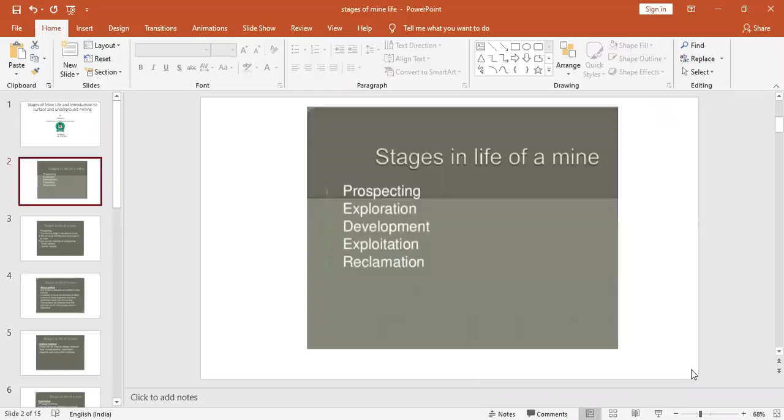Stages of mine life. There are five stages of mine life: prospecting, exploration, development, exploitation, and reclamation. Prospecting is the first stage in this stage of mine life.

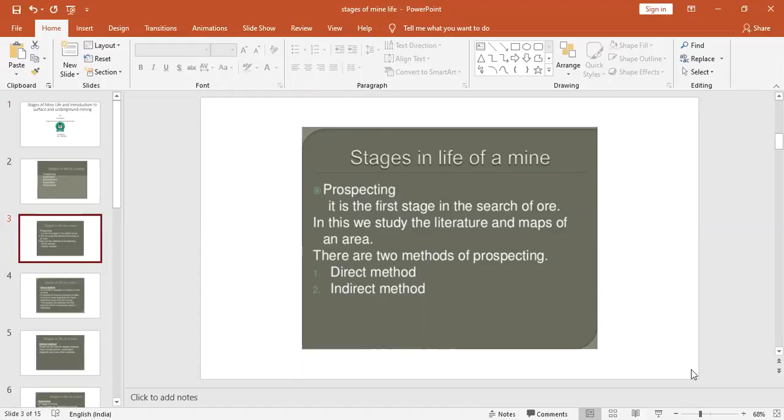In this stage, there is a search of an ore. The study of literatures and maps of the area is done. In prospecting, there are two methods: direct method and indirect method.

In direct method, it is limited to the surface or near the surface, meaning near to the outcrop. It consists of visual examinations of either outcrops or loose fragments that have been weathered away from the outcrop.

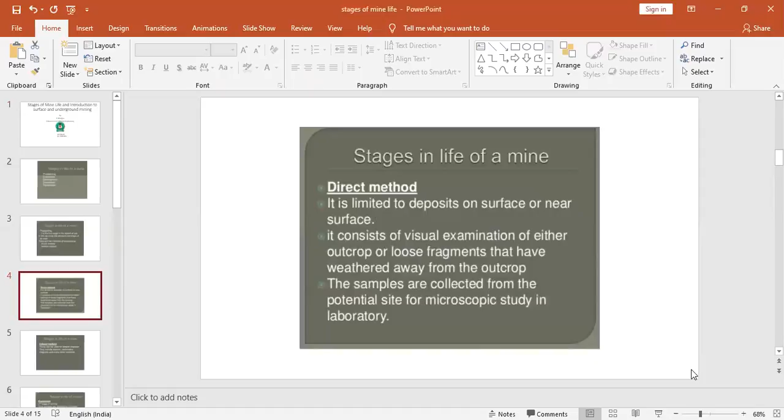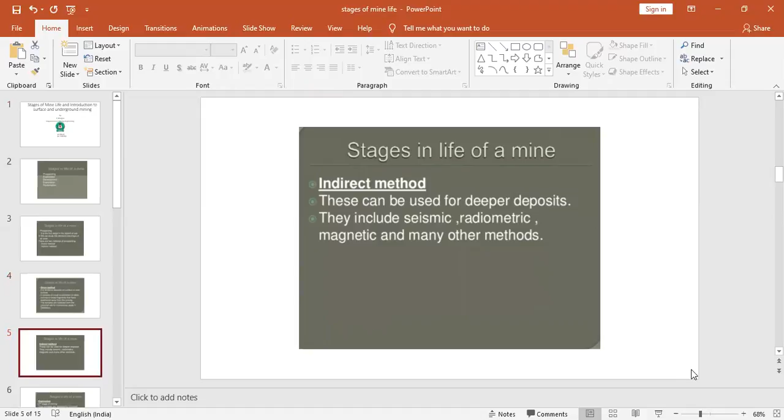The samples are collected from the potential site for microscopic study in the laboratory. In indirect method, it is a method where deeper deposits are present. It includes seismic, radiometric, magnetic, and many other methods for search of ore deposits.

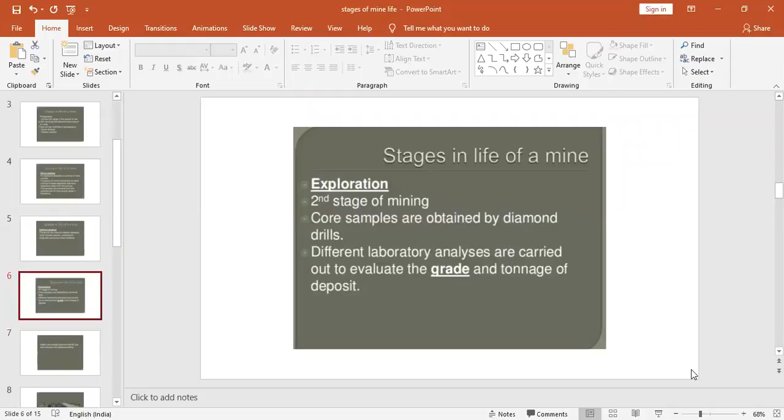The second stage is exploration. In this stage, core samples are collected by diamond drills. They are subjected to laboratory analysis, which are carried out for the grade and tonnage of the deposit.

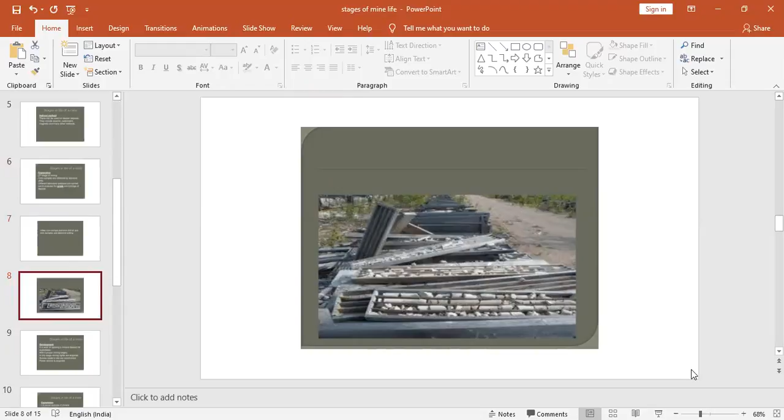For core samples and diamond drill bits are used. Here we have a picture of core samples which are collected from the drill holes and stored in a rectangular box for further process development.

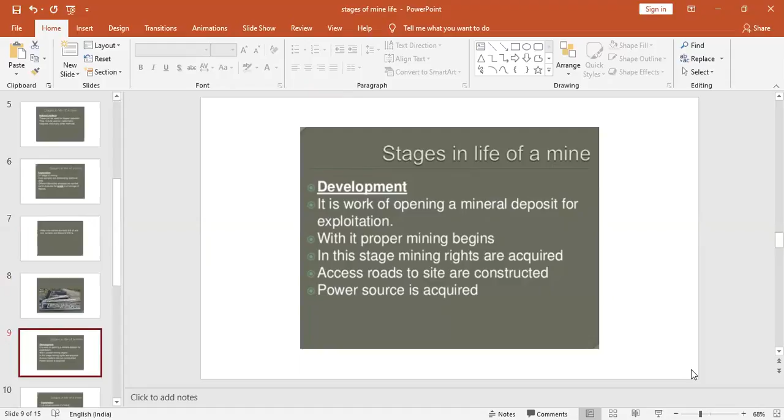This is the third stage of the mine life: development. It is the work of opening a mineral deposit for exploitation, with which proper mining begins. In this stage, mining rights are acquired, and development of access roads, construction, and power supply is started.

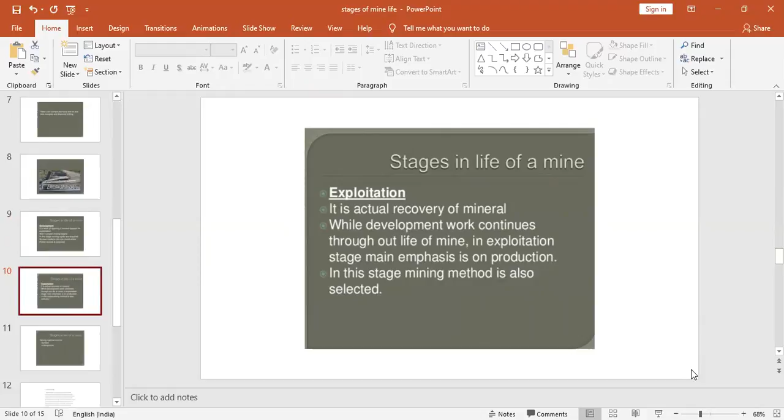Exploitation is the actual recovery of minerals, and this work continues throughout the life of the mine. In this stage, the main focus is on production, and mining methods are also selected. The mining methods are of two types: surface and underground.

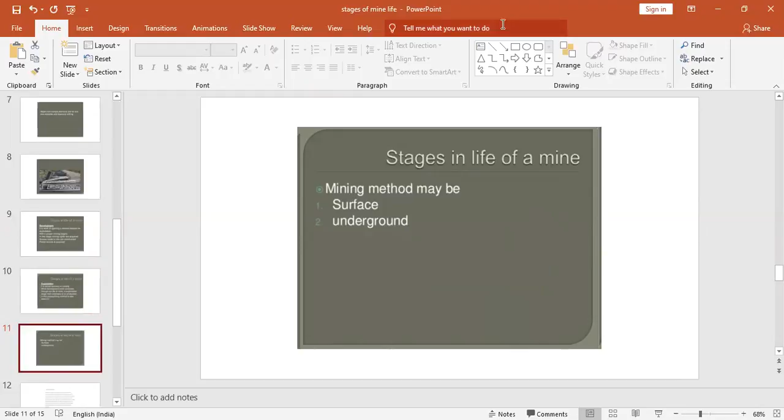This is regarding the stages of mine life. Now, a small introduction to underground and surface mining.

A small introduction to underground and surface mining: open cast mining and underground mining are the mining methods. Coal is mainly mined by two methods: surface or open cast mining, and underground mining. The choice of method is largely determined by the depth, geology of coal deposits, and other factors.

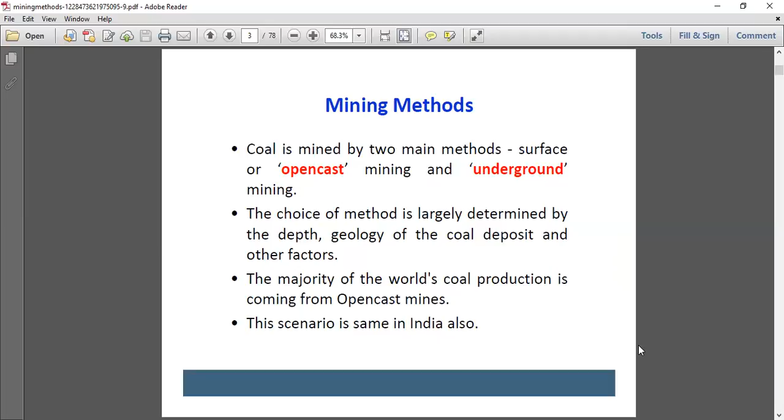The majority of the world's coal production comes from open cast mining. This scenario is the same in India also. The mining process includes drilling, blasting, loading, hauling, transportation, and processing or washing. This is a common process for every open cast mine.

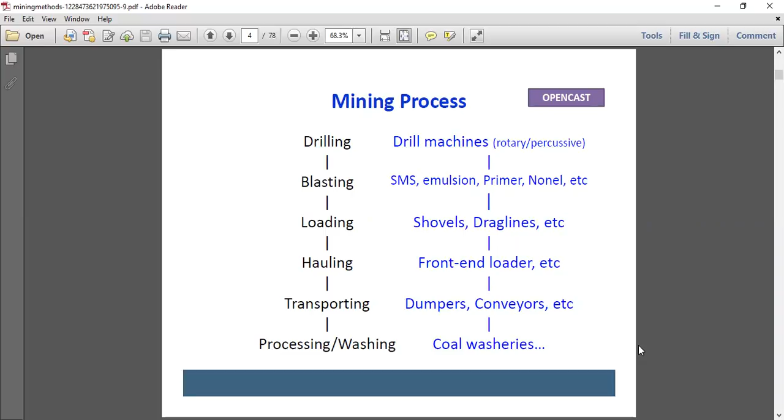Drilling includes drill machines; blasting uses SMS, primer, Nonel, etc. Loading uses shovel, dragline, etc. Haulage uses front end loader, etc. Transport uses dumper, conveyors, belt conveyors, etc. Washing uses coal washeries.

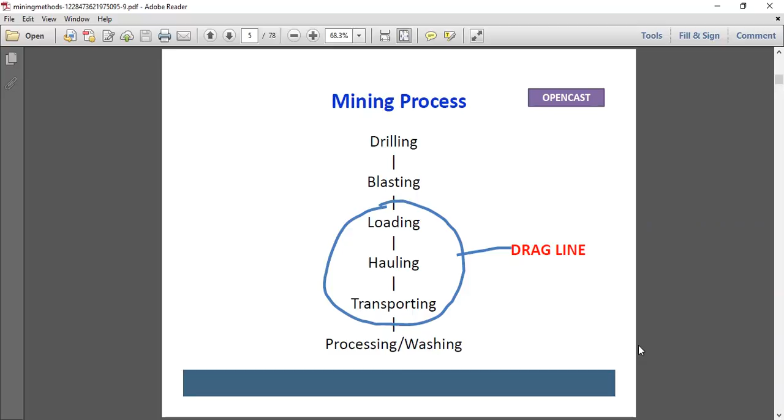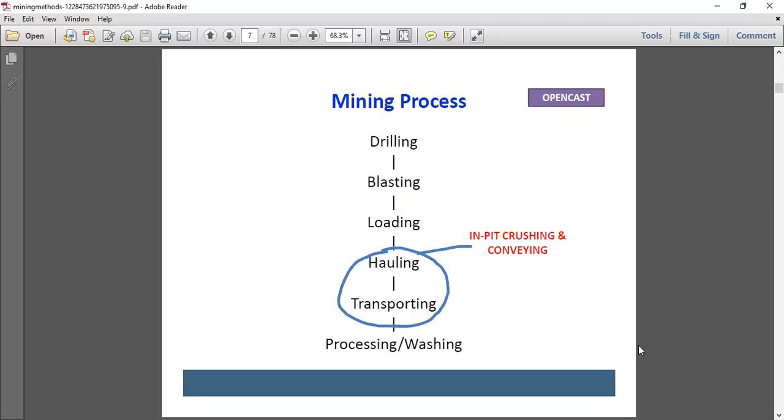The drilling process: mining process includes drilling, blasting, loading, hauling, and transportation. Loading, hauling, and transportation is done by dragline. Drilling and blasting is done by surface miner. Haulage and transportation is done by in-pit crusher and conveying.

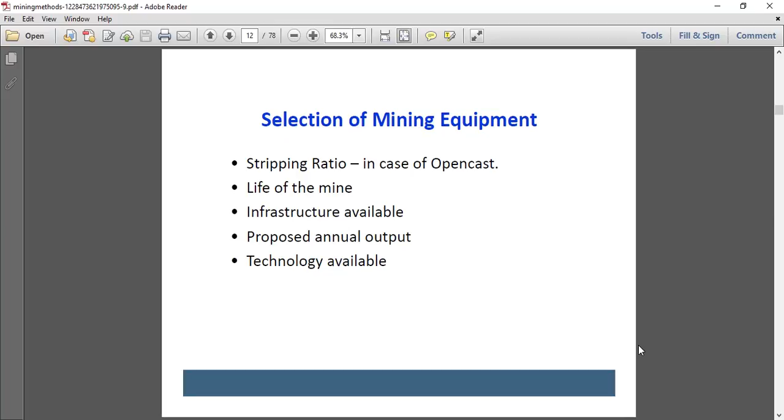Selection of mining equipment mainly depends on the stripping ratio, life of the mine, infrastructure available, proposed annual output, and technology available. Open cast machinery includes shovel-dumper combination, dragline, surface miner, bucket wheel excavator, and in-pit crusher.

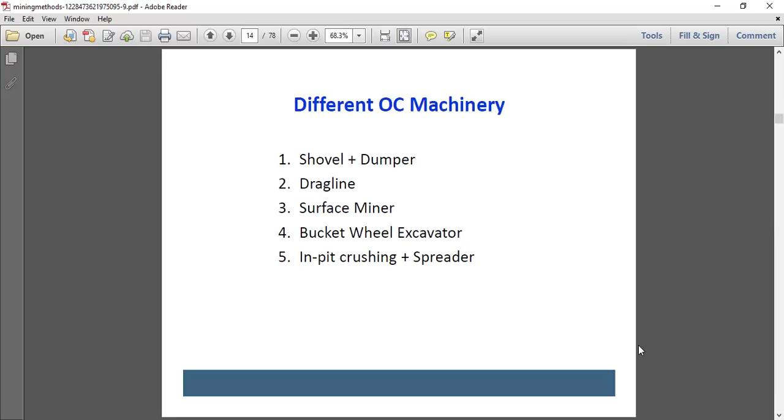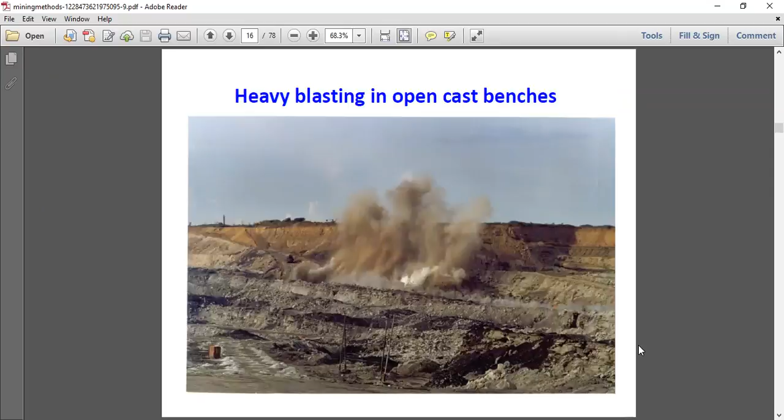Shovel-dumper combination allows multi-seam extraction, more flexibility, and can work in steep gradients up to 1 in 5. Here is a pictorial representation of the shovel-dumper combination.

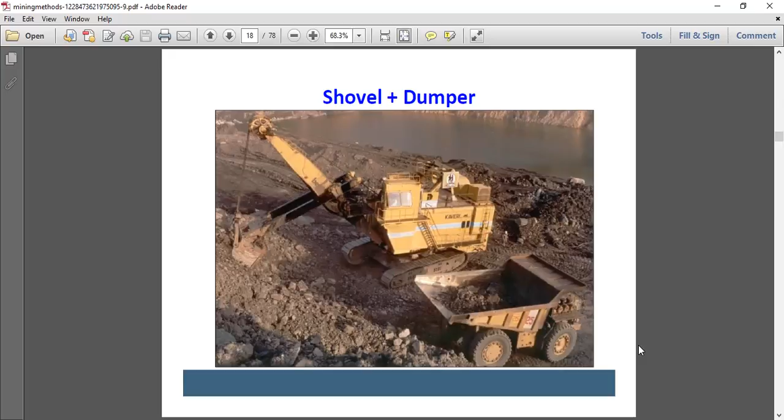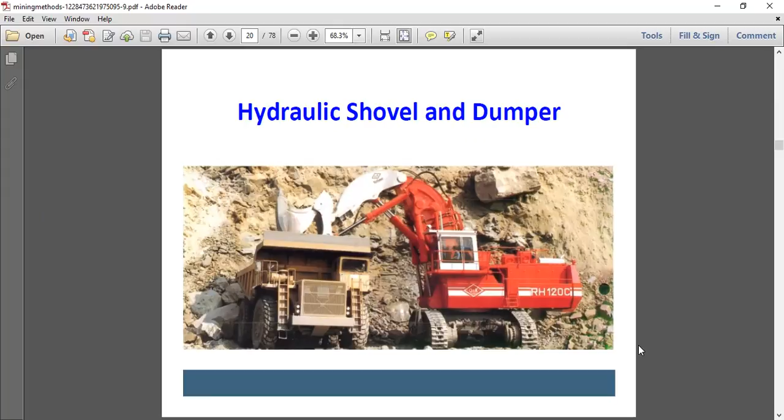Here is a rope shovel and dumper combination, and a hydraulic shovel and dumper combination. Comparing rope shovel and hydraulic shovel, the rope shovel and dumper combination produces higher production than a hydraulic shovel.

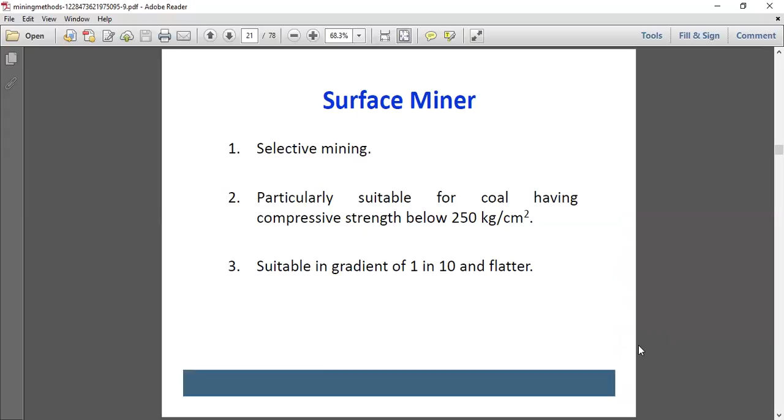Selective mining is particularly suitable for coal having compressive strength below 250 kg per centimeter square, and is suitable in a gradient of 1 in 10 and flatter. This is done using a surface miner.

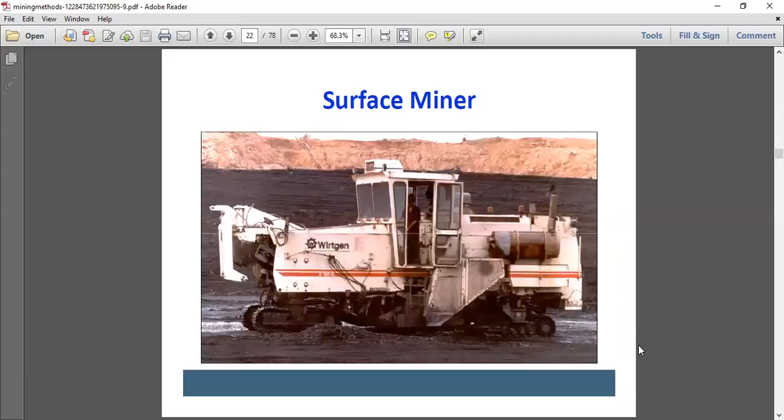This is a picture from the field work.

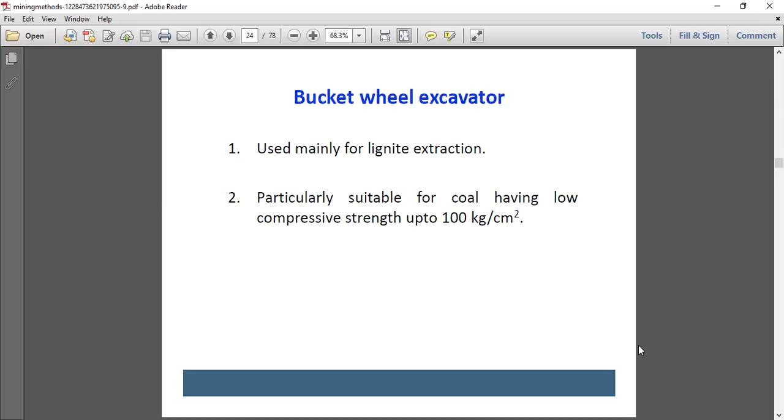Bucket wheel excavator is mainly used for lignite extraction and is used for soft deposits. Where deposits are harder, drilling and blasting is adopted. Bucket wheel excavator cannot dig hard deposits; it is particularly suitable for deposits having low compressive strength up to 100 kg per square centimeter. This is a picture from the site of a bucket wheel excavator.

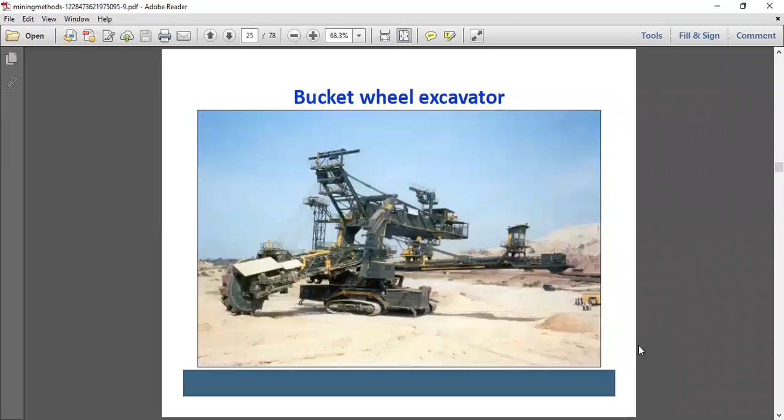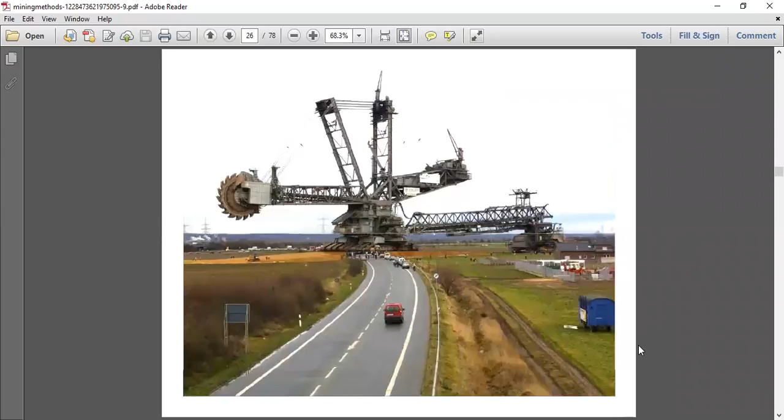Bucket wheel excavator is only adapted at Neyveli in Tamil Nadu. It is the largest equipment in India, or else in the world, and it can work continuously without any break.

The bucket wheel excavator rotates in a continuous manner, where it has buckets that perform the loading by itself, and the loaded material is transported simultaneously by conveyor belts.

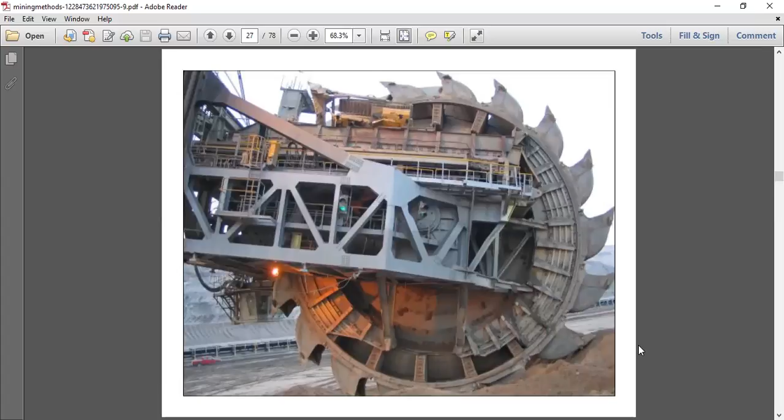Dragline can adapt to a gradient flatter than 1 in 6. Dragline stands on top of the bench, and it is mainly suitable for the extra removal of overburden in open cast mines.

The seam should be free from faults and other geological disturbances. The deposit should have a major strike length. A hilly property is not suitable. The deposit should have at least 15 years lifespan.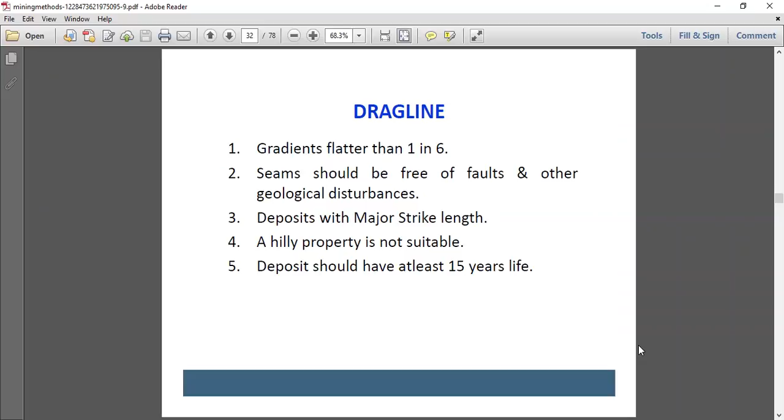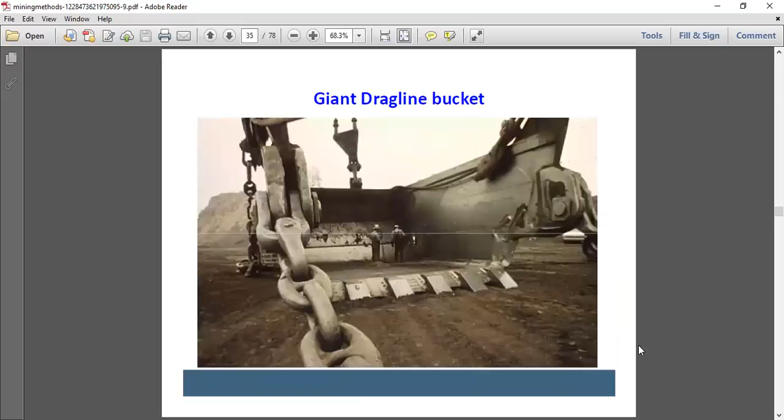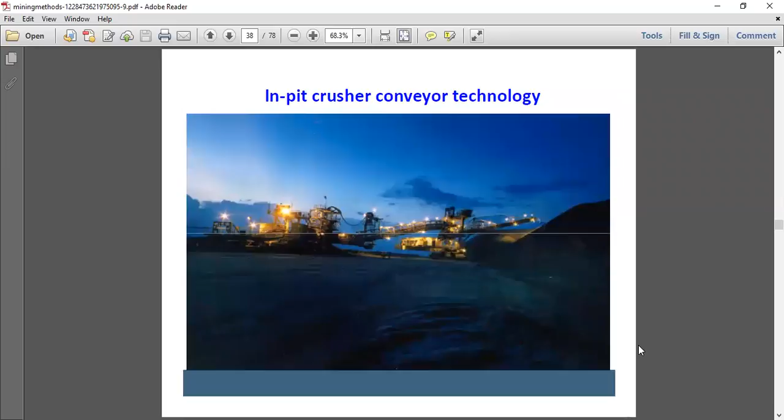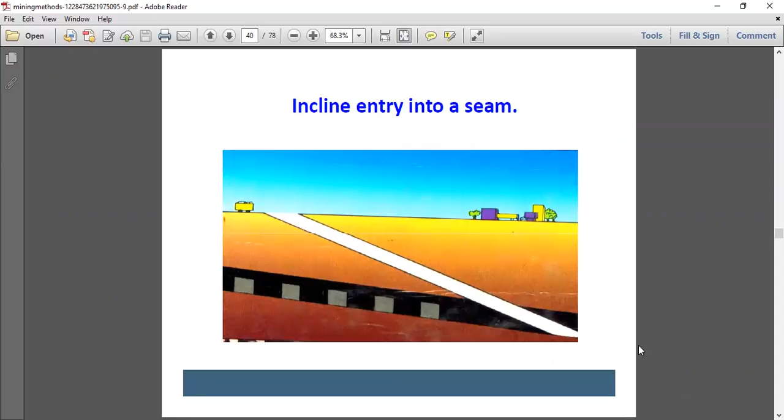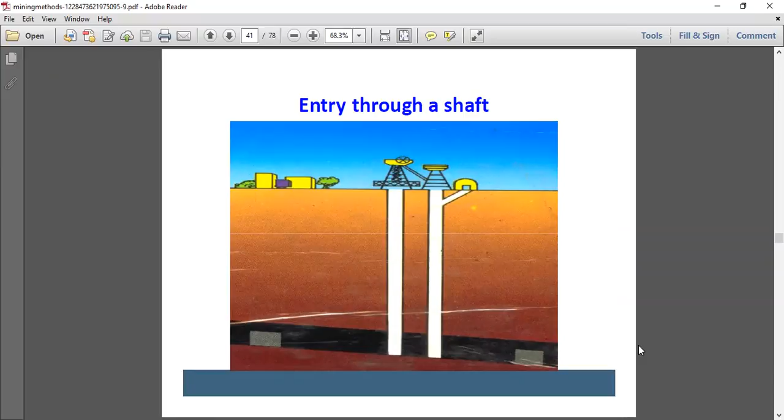Entry through a shaft. A shaft is a vertical opening from the surface to an ore deposit.

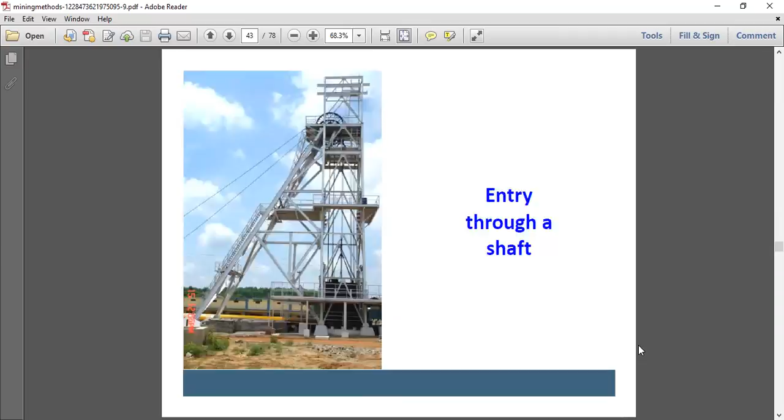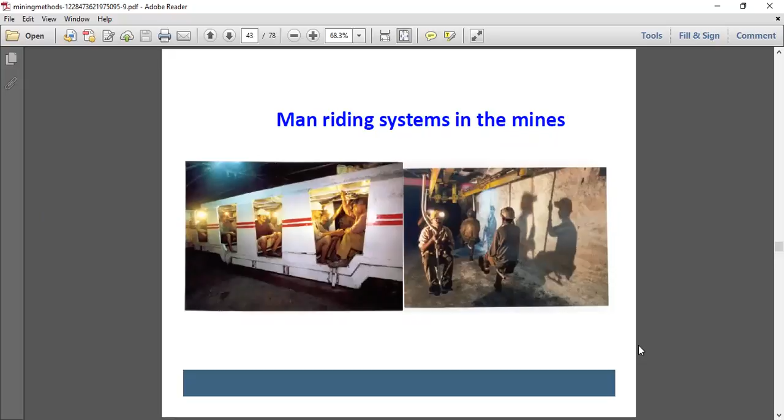This shows the man riding system in the mine, where employees are transported by the man riding system to a certain distance.

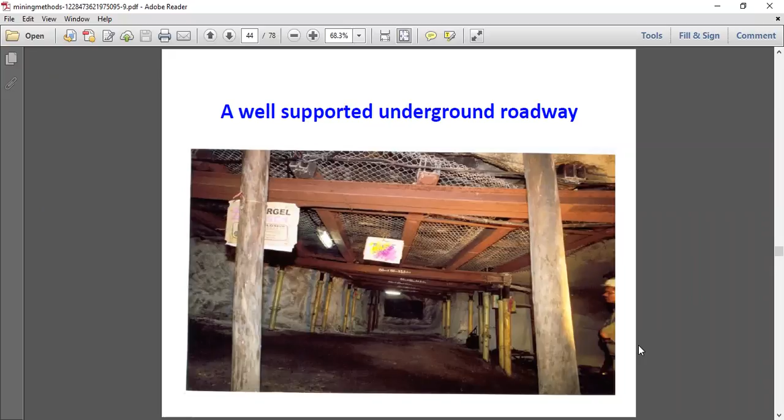A well supported underground roadway, where the gallery is supported by roof bolts.

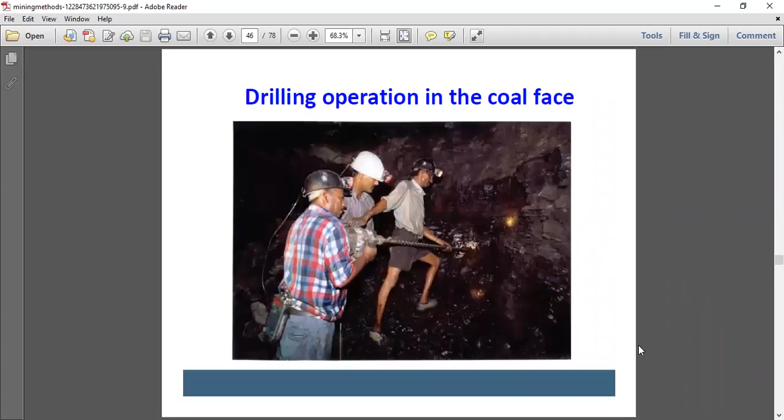Drilling operation in a coal face machinery, manual coal loading.

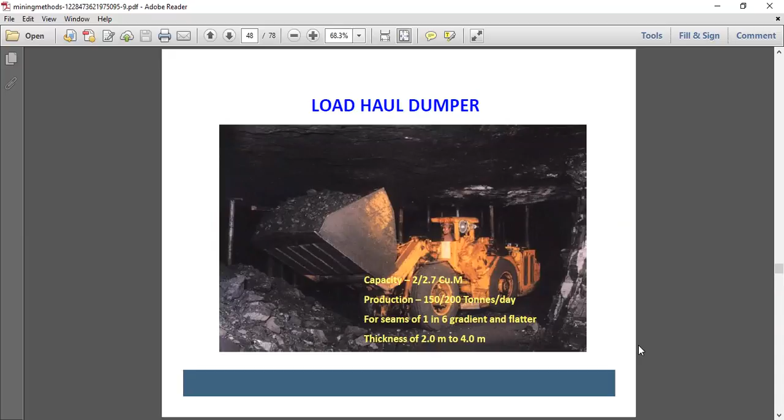Haulage: load haul dumper, with capacity of 2 to 2.7 cubic meters and production of 150 to 200 tons per day, for seams of 1 in 6 gradient and flatter, with thickness of 2 meters to 4 meters.

Side dump loader, with capacity of 1 cubic meter and production of 120 tons per day, for seams of 1 in 5 gradient and flatter, with thickness of 2 meters to 3.5 meters.

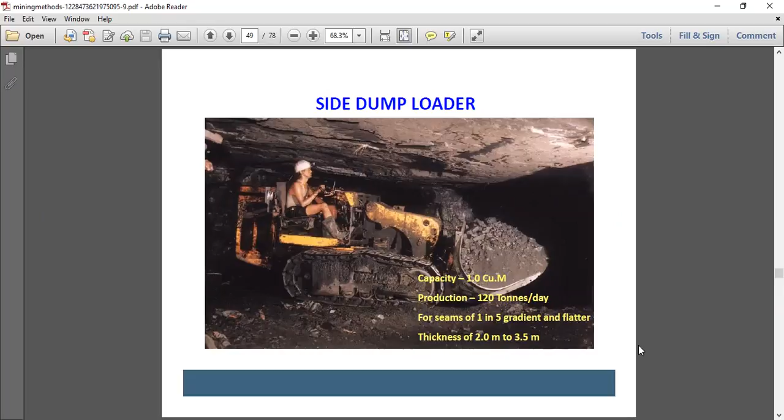Mechanized drivage machinery with a rate of drivage of 6 meters per day and production of 150 tons per day, for seams of 1 in 4 gradient and flatter, with thickness of 2 meters to 4 meters.

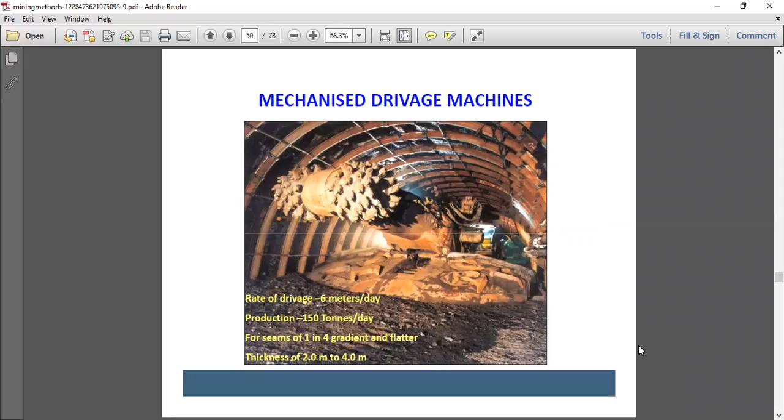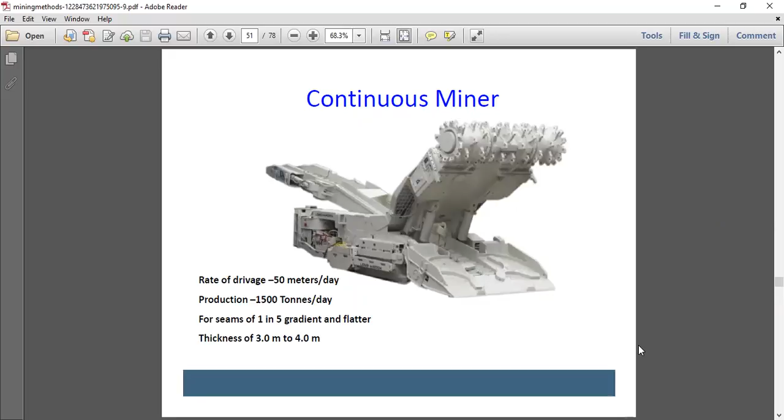Continuous miner with a rate of drivage of 50 meters per day and production of 1500 tons per day, for seams of 1 in 5 gradient and flatter, with thickness of 3 meters to 4 meters.

Mechanized roof bolting machine which bolts 240 bolts per day, for seams of 1 in 5 gradient and flatter, with thickness of 2 meters to 5 meters. Using this mechanized roof bolting is economically suitable for the mine.

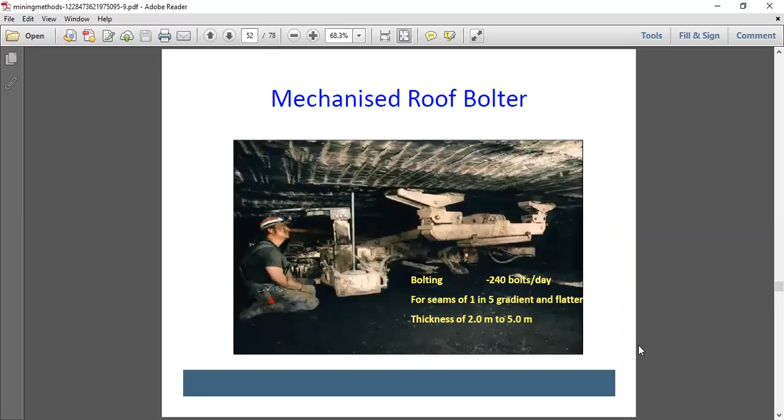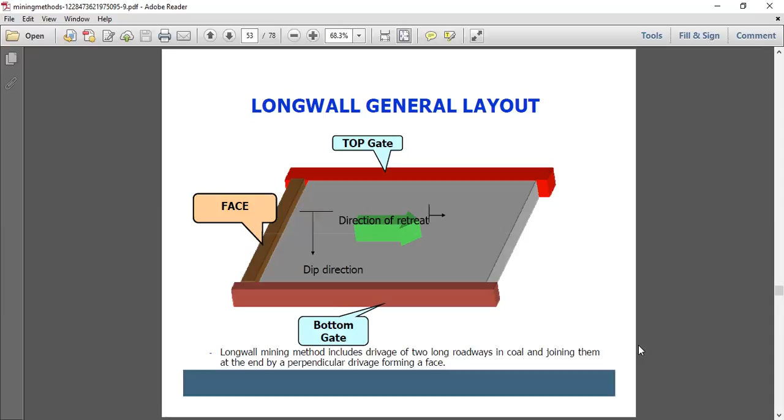Dip and strike direction, where the roof is supported, as shown in this pictorial diagram.

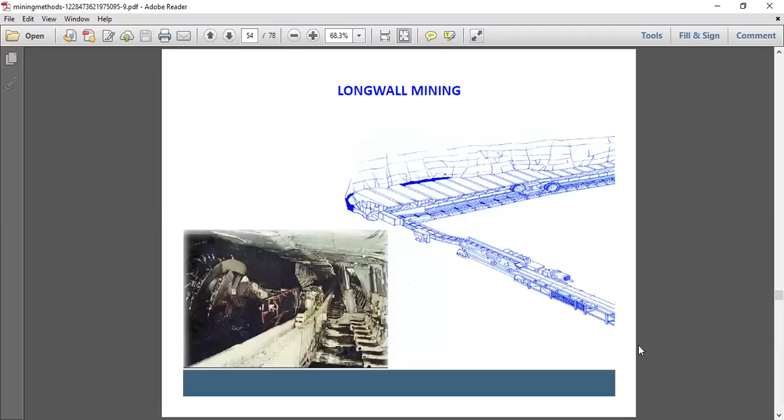Shearer working at the long wall face. The shearer works continuously and cuts along the face.

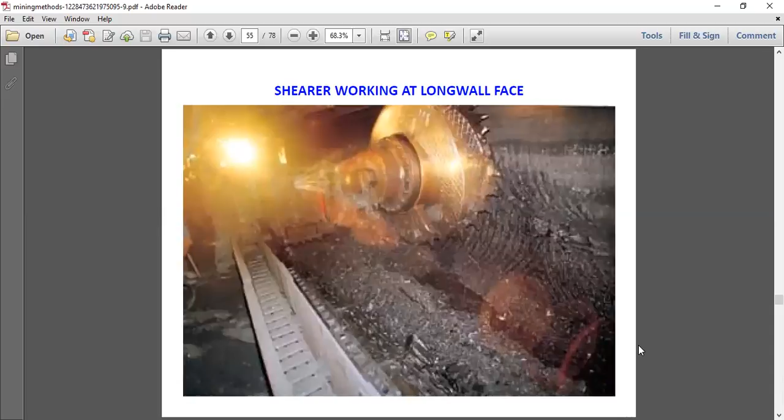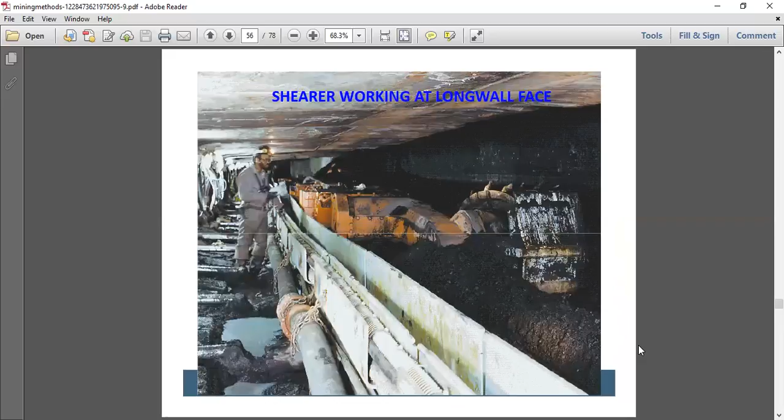Shearer working at the long wall face. A shearer consists of two drums, at the rear and at the front, which simultaneously cut the whole section of the face—one cuts the upper section and one cuts the lower section.

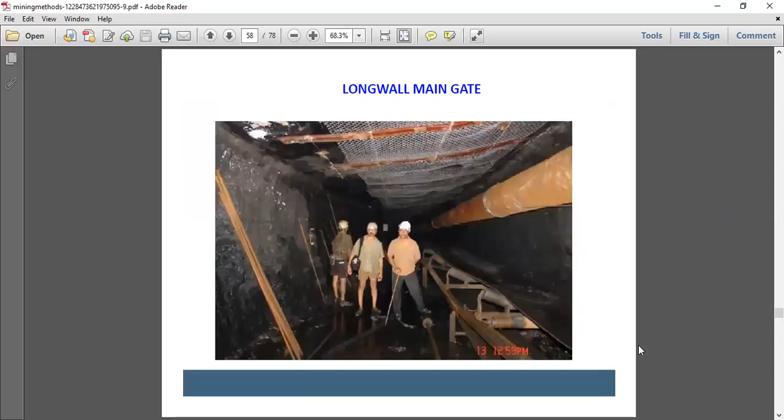New concepts going to be implemented in India: high wall mining, trench mining, and bench mining.

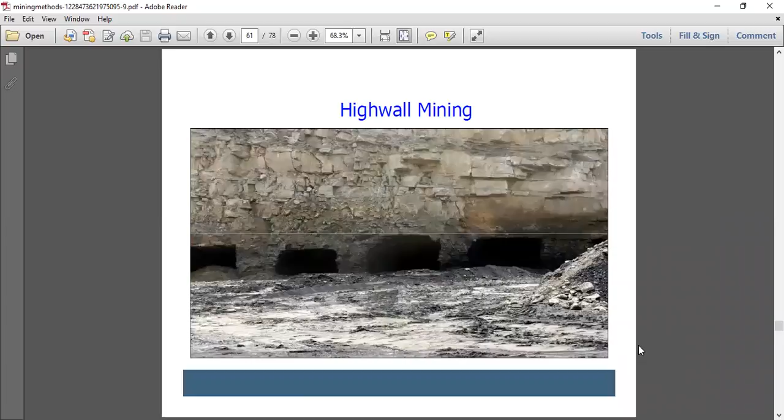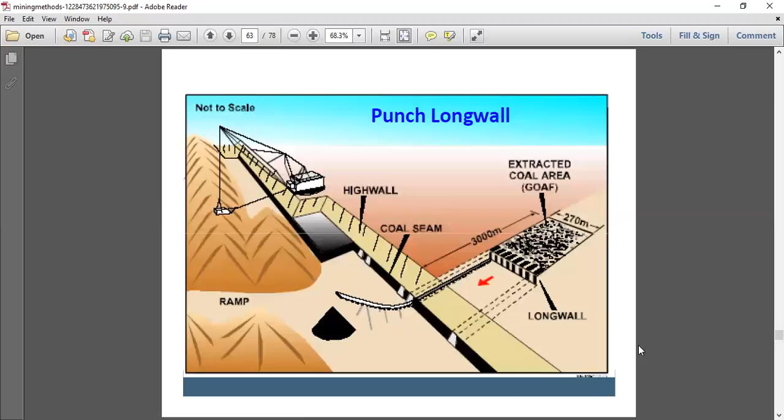Here we can see the ramp of high wall mining, where the coal seam is connected and the extracted coal area goes for long wall — a punch long wall advantage.

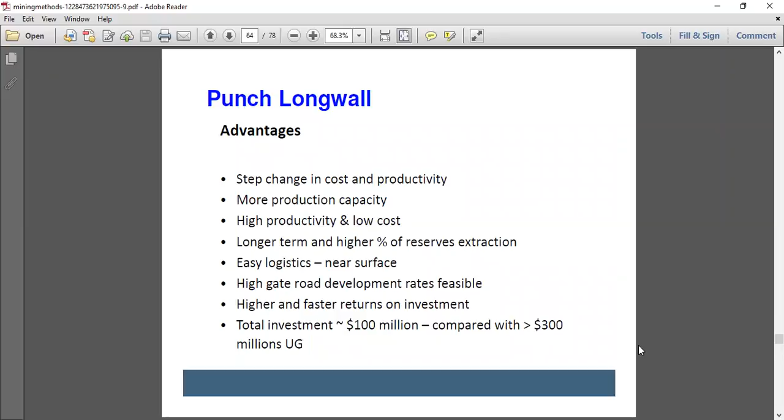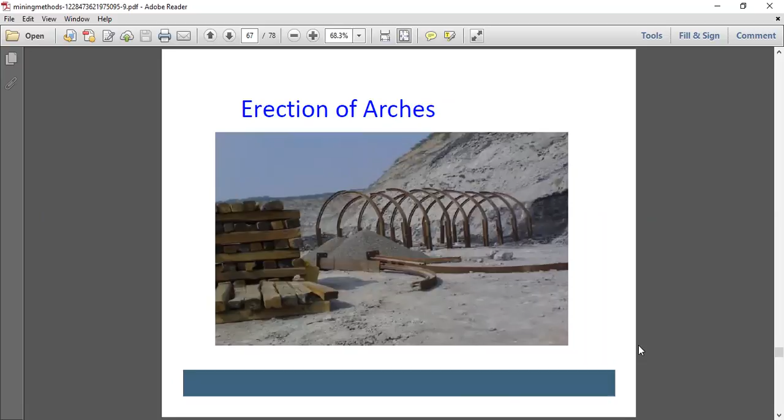Here you have arches for supporting the roadway, at the entry of the roadway.

Longwall top coal caving.